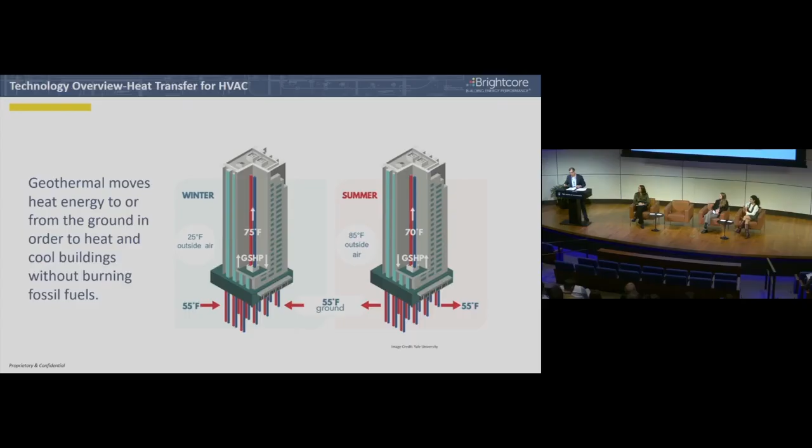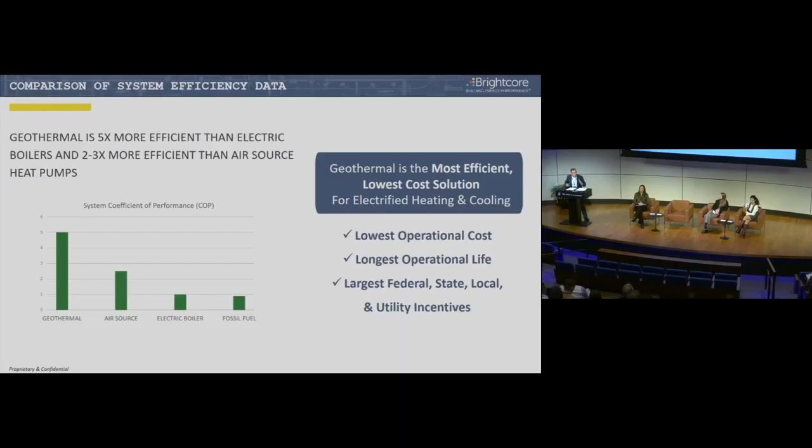So this is what really excited me about geothermal. The coefficients of the performance, it is simply the best way to heat and cool a building. But there's enormous challenges in doing it. If everybody could have it and it was cheap, sure, we'd all be doing it. But it's a real narrow applicability.

There's not a lot of work done in the retrofit market where, say, a place like New York City, 80% of the buildings are going to have to be retrofitted. They're going to be here in the next 30 years. You're not just going to blow up the Empire State Building and put a LEED platinum building in this place. You have to change the guts of that building. And if you're just doing lighting, we're not going to get there.

But it also requires really customized solutions. This is not a product that I can stick at all kinds of different places. You have to either bespoke, and they're very customized. We're going to talk about that in the project that we're doing at Yale. And finally, it's a really... whoops, I must have hit that. I got excited, sorry guys.

It's a disaggregated industry, and that speaks to this slide. There are all kinds of trades involved in this. You have designers, you have financiers, you have drillers, you have all kinds of construction work.

So what was first of its kind about this industry is that we changed the business model. We integrated everything. We made it turnkey, which sounds kind of easy, but it turned out to be incredibly difficult. We started out, and Dave, our head designer, is in the room, we started out with better design capabilities. Europe is about two decades ahead of us, and we're transferring a lot of their knowledge and experience across the Atlantic into using it in North American markets.

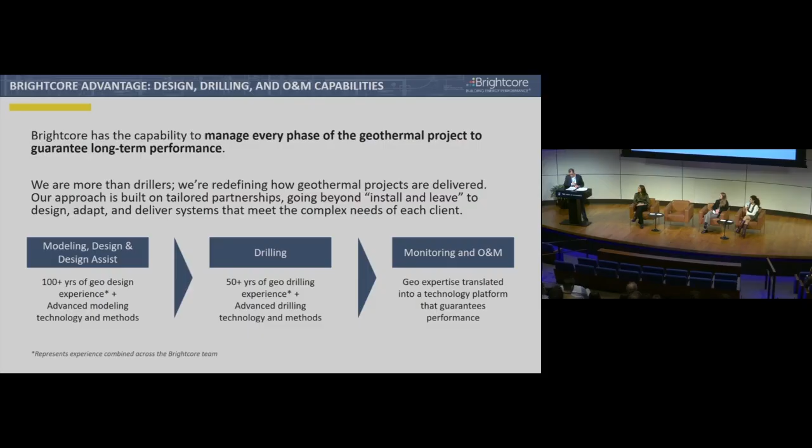So we invested very heavily in drilling equipment, which I'll show you in a moment. That's the design, and I'm not sure if that thing's supposed to rotate. One of these things is very, very cool.

We can design a solution in such a manner that we can actually get inside existing buildings like this if the operating system here needed to be replaced. That is a game changer because it opens up the addressable market tenfold. We can also do it in new builds, which is typical, but we can do it on angles and in space-constrained locations. So, to me, that's a real difference maker.

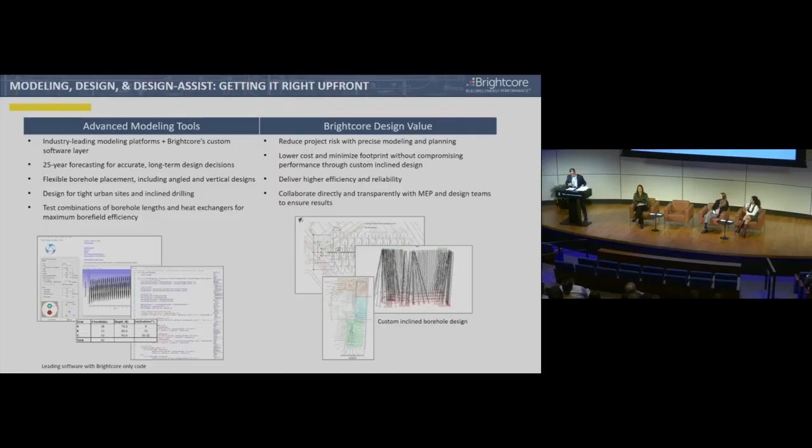You'll see a bunch of the equipment we have is absolutely vital. It's expensive, it's time-consuming, and it's very difficult to find workers to do this. I can buy all the equipment in the world, but if I don't have somebody to run it, I'm in trouble.

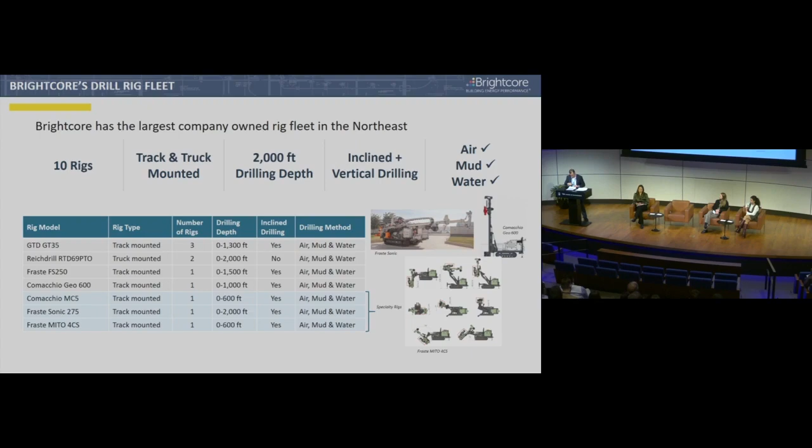Julie Zimmerman at Yale University has been really good about starting to think about how we get workforce development. We can get into that in a second, and in the last slide we'll talk about it a bit. But the urban geo that we are talking about is an example, and I'll show you a slide in about two minutes about what we're capable of doing - kind of seeing is believing.

The last aspect of this, though, is monitoring. I can tell you all the great things that geo is going to do, but if I do not have data and I do not have numbers, this is fiction.

Now we're starting to monitor these things, the O&M, the operations and maintenance. We come in there thinking we're the best thing since sliced bread, against an old school that knows how to run this system. We've been doing a lot of work with the former head of Princeton, and he said, look man, my operators don't want to talk to you. We are not going to be beta testing something that may be great in the future. It's binary - this thing works or it doesn't.

So we really have to de-risk these things. And this is a game changer for the industry.

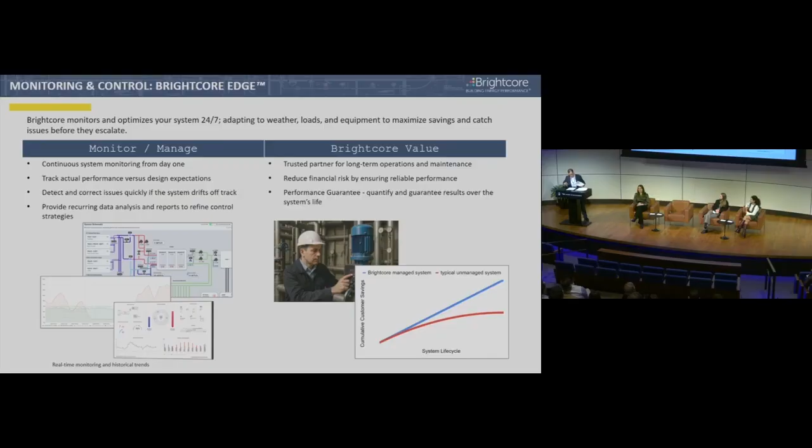In the end, we are selling savings. This thing either works and lowers your bottom line or it does not. We want all the decarbonization in the world, but it's got to make financial sense.

This is an example of what is first of its kind in North America. We were able to go to the Beresford at 81st and Central Park West - a 125-year-old building. We were able to slip this little rig into the freight elevator, make a gantry system, and take out what was the coal room, which became the oil room, and is now the geothermal room. They're saving 45% on their common area costs, and they've diminished their carbon footprint by about the same. That used to run on coal, then oil - now it's a very, very small amount of electricity to run those pumps.

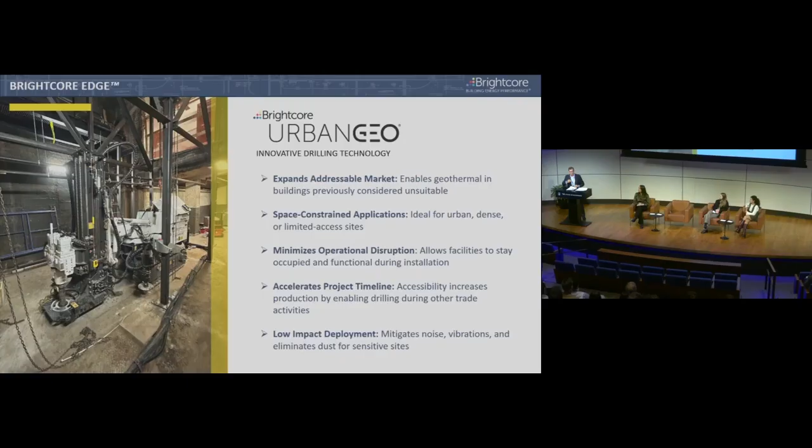Really cool. So what's first of a kind at Yale? Basically everything - every headwind that we have in the industry is on Science Hill. And we are so thrilled to be part of it, and scared, and learning.

So on your dime? No.

We have gotten so much better because of the hoops that we have to jump through - our drilling team, our design team. It has been a profound change, because if we want to have a customized solution for this university or that particular building, we have to know about that building. We don't - we know how to drill. Yale University knows about Yale, and what their needs are, and what their limitations are. And so it's been a real partnership that I'll talk about in a second.

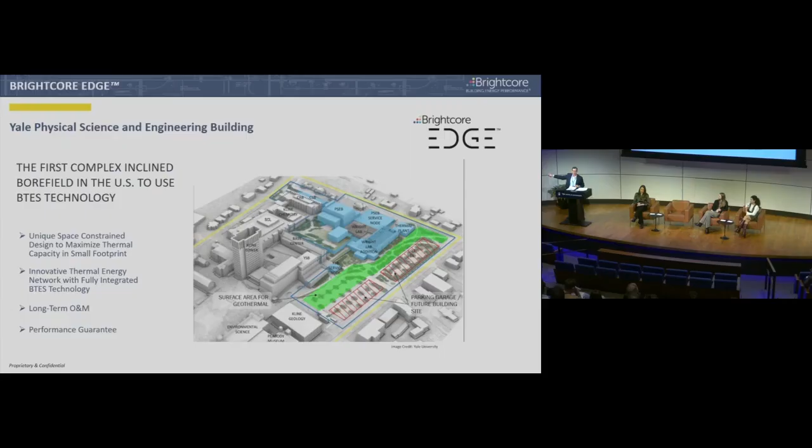But the other thing is space constraint, as I talked to you before. The property lines outside where we had to drill were incredibly tight. So as soon as we start deviating even a little bit - you're putting boreholes down that can go 850 feet - if you're off by a percentage, you're in your neighbor's house, and that's a problem. So we really had to be very accurate about that. Every bit of skill... this thing may rotate. There you go.

That is the bore field. If you look, this is not a typical design. They're usually 20 feet at center, which means you need about a football field or two to get the thermal mass you need to heat and cool a building. We are able to do it.

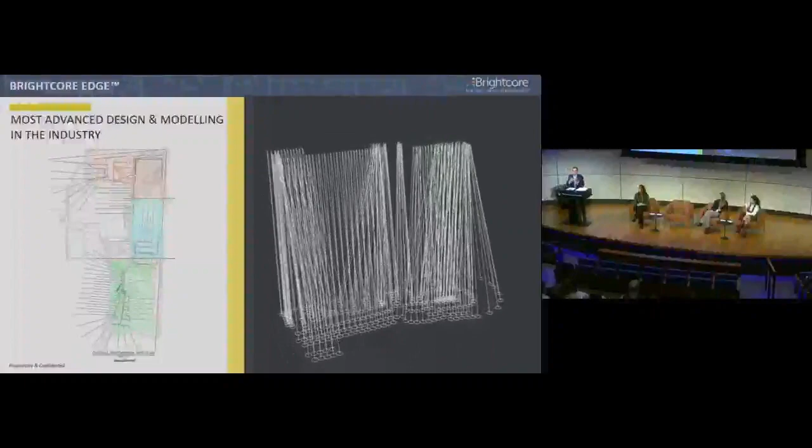The perforations in the surface are very, very small. We designed something for Malone Hall that instead of being a rugby field on the surface, it's truly not a bowling alley, but a bowling lane. They're 5.5 feet at center, and they come out on angles, very accurate angles on where these things are placed, so there's no thermal creep, right?

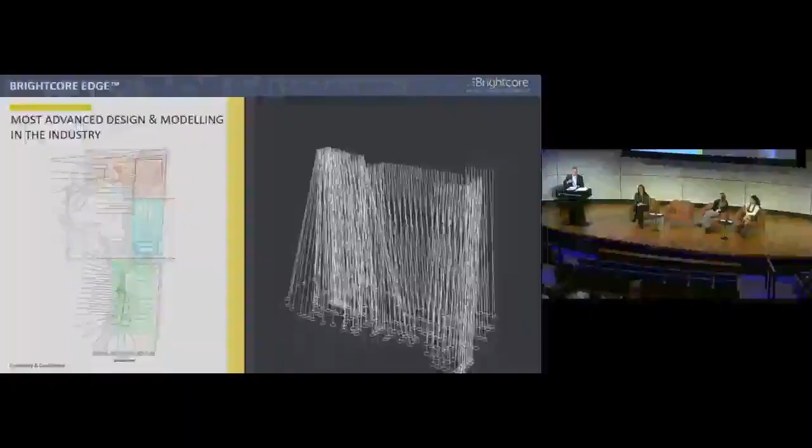So that one borehole is not influencing another in terms of its therms. This is game-changing for the industry, so it's very, very difficult. It's very complex, and to drill that is very, very hard. So we're extraordinarily proud about it. It's 262 boreholes in a space that's about 60% less than what a typical bore field would be. So that bowling lane accesses a thermal mass of a rugby field 800 feet down. That's kind of the beauty of this thing.

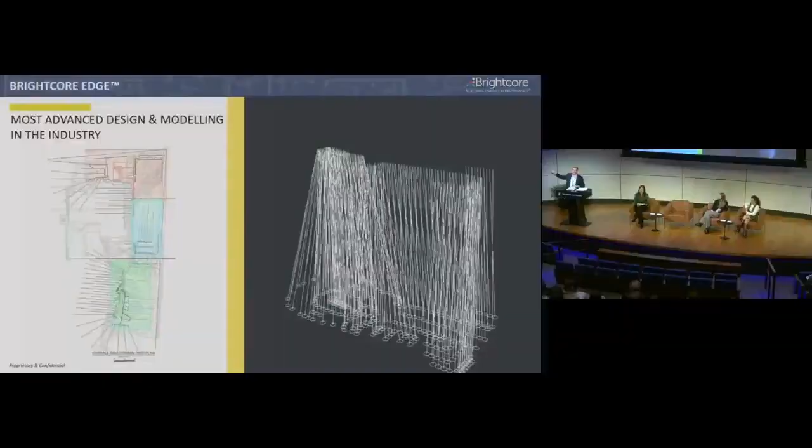The other thing that we have is a thermal battery, BTES, borehole thermal energy storage. We can preload individual boreholes, those lines - this one, that one, this one. Why? Because we have 60-second interval data, and we know tomorrow that the temperature is going to fall 17 degrees Fahrenheit. So we throw the energy in those holes, pull it out tomorrow at the peak.

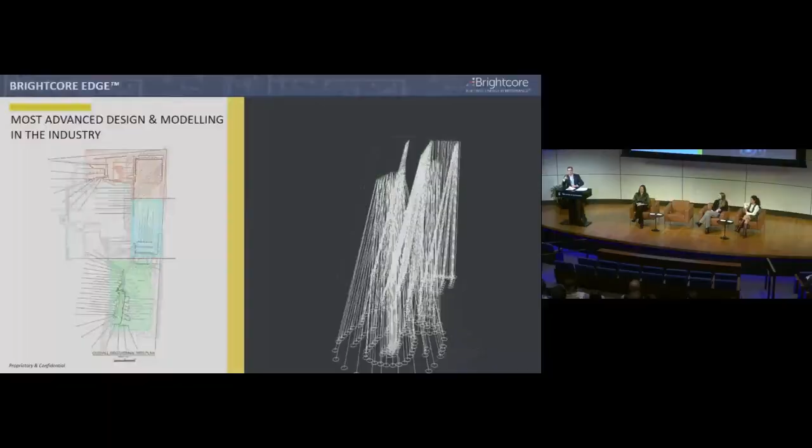The execution was extraordinarily hard, and I think I'm probably running out of time, so I want to hear the rest of the panel. But I will tell you the big challenge was there's 18 other trades here. We're bumping into everybody on an extremely aggressive time horizon to get this thing in, get the other trades done. All of this stuff makes sense in terms of federal funds coming and all that. So we had to be very, very accurate about what we're capable of doing and staying on that schedule.

And Yale has made us absolutely a better enterprise. The big thing, though, and we knew this going in, but we didn't know how hard it was - the Connecticut River Valley has very specific sticky clay. And if anybody walked by that field, it turns into basically Play-Doh. It's everywhere. It's on your shoes, it's in your nose, it is everywhere.

We had to develop a system just to get the spoils out so that we could actually return the water to the standards, the criteria that they have for kind of flushing the water through the system. And it was a bear to do. It made us behind schedule, which made the rest of the thing behind schedule, which made Mike Schreier very angry, which made me very scared, and we fixed it. So it was a really cool thing that we were able to do.

Finally, operations and maintenance I mentioned. We have put so much time and energy and money into this that now we have a 10-year performance guarantee, and this is a first in the industry. We are guaranteeing the thermal mass, the BTUs that the contract says - we'll legally have to supply these things. So we're at risk, not Yale. We're de-risking it for our clients and ourselves by the accuracy that we're able to bring. If you can imagine this campus, how much infrastructure is underground, when you're doing that borehole, you better be accurate.

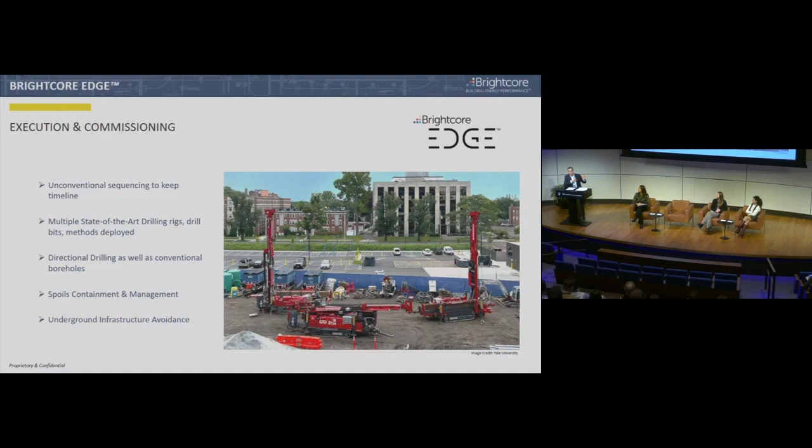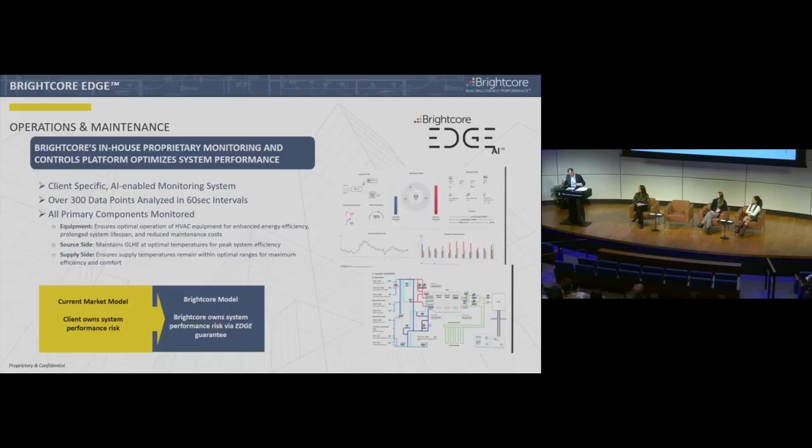Whoops, I'm a little behind here, guys. Sorry about that. So what do we need to scale? We need to change the model. We need to have this integrated approach. We have to lower time, we have to lower risk, and we have to lower price. That'll come with scale. But to me, the biggest thing is really the unforeseen challenges, the specific needs.

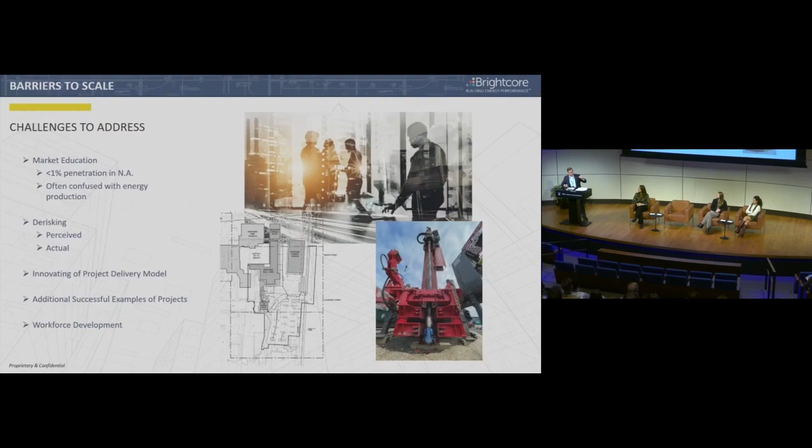You have to marry that partner. This is no longer Yale hiring a vendor. I'll just leave you with this thought - this is very much a marriage. A little bit corny, but honestly, we were talking about partnering with Yale. And this never would have gotten off the ground unless we could have iterated many, many times, because the conventional model would not have sufficed.

And we learned, even in a design coming in, what's possible. If you do not get a certain amount of BTUs, that 40% ITC - 40% of the project being paid for by the federal government - you weren't eligible for it. So having this thing right, understanding what the parameters are, and jumping through the hoops that Yale said is absolutely critical, or we're never going to scale. So it really has to be a custom-made solution, and you have to have a partner on the other side that is willing to partner with you.

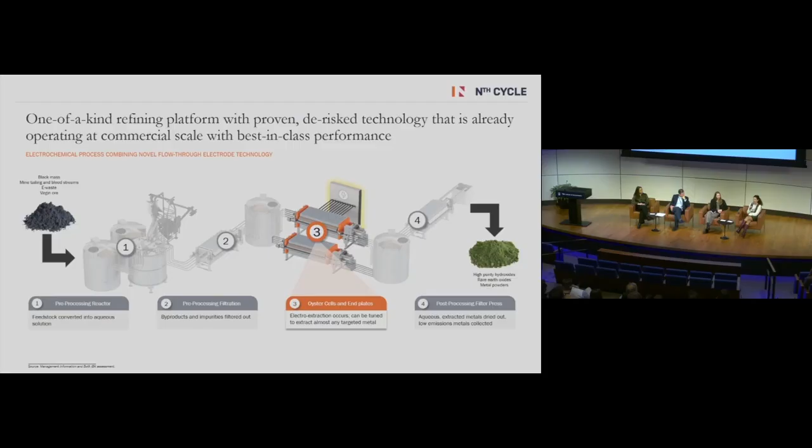While my slides are being put up there, we were asked to talk a little bit about our past and what drove us to get to work on first-of-a-kind projects. And I've had a bit more of a career jungle gym than a career ladder. I started off, I went to school at McGill University in Montreal, and I double majored in sociology and international development.

Quickly realized upon graduation that there are not a ton of jobs in sociology that you could really pursue. And actually, upon the recommendation of a friend, they said a lot of these consulting companies don't really care about your background, they're more interested in the way you think. So I applied and got into PricewaterhouseCoopers and was working in risk assurance, or internal audit.

I'm actually a certified internal auditor. I loved that job because it taught me how to think about risk and control gaps, but didn't see myself doing that for 10 years plus.

Then I was very fascinated with urban planning, so I ended up going back to school. I went to MIT and pursued a master's in city planning, and then moved to Houston, which funnily enough has no zoning. I worked as a planner there for 2 years. Again, I loved it, but just by way of being in the energy capital of the world, you sort of get sucked into energy. Oftentimes, I was the only person at a dinner party that wasn't in energy.

But then Greentown Labs opened up their Houston site, and Greentown Labs is sort of like the first-of-a-kind climate incubator that allowed a lot of the incubators in the space, like Climate Haven, to pop up after their success. I worked in partnerships there for 3 years. Nth Cycle was a member, or is a member of Greentown Labs, so was Fervo Energy.

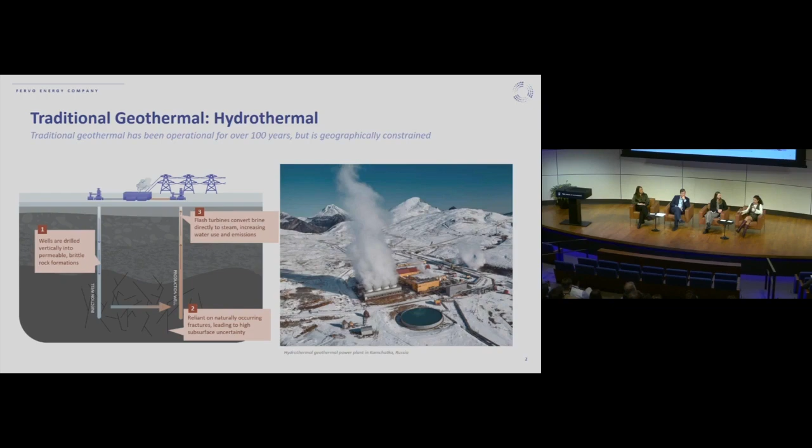Very problematic. So what Fervo does is take a playbook out of the shale revolution in oil and gas: we drill a doublet, which is an injection and production well. We go vertically, then drill horizontally, and then hydraulically fracture to engineer those fractures. Effectively, we eliminate dry hole risk.

We still inject water, it still heats up and goes back to the surface, but Fervo uses something called an organic Rankine cycle turbine, which is effectively a closed-loop, zero-emission turbine. Everything injected is recycled and reused, we have a very low percentage water leak-off rate, and zero emissions in the process.

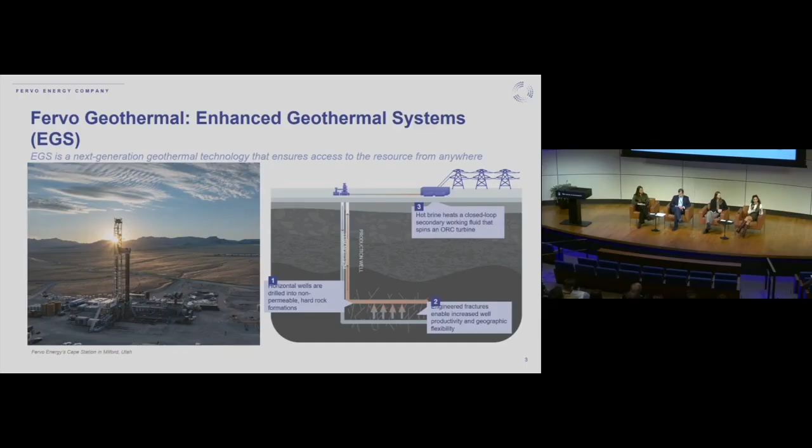Fervo was started in 2017, and I think a lot of life is a confluence of hard work and good luck. We de-risked geothermal at a time when power demand is surging, and people are very interested specifically in firm baseload power—power that's on 24/7. A lot of the hyperscalers driving that growth still have climate commitments, and geothermal is such an excellent solution because it addresses both.

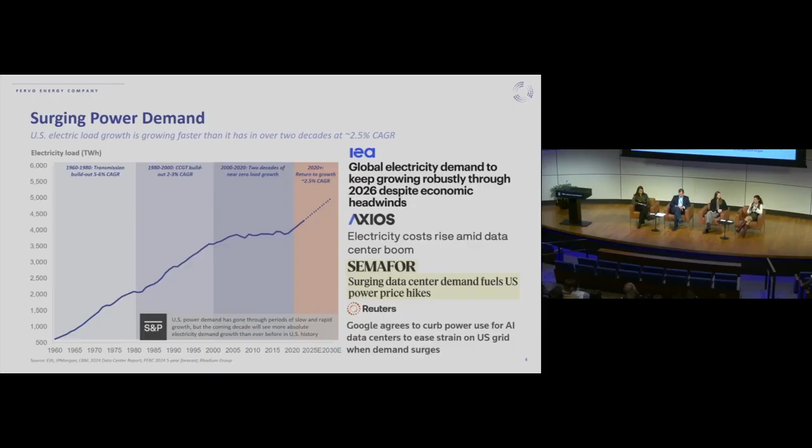That's incredible. But how do we know it's going to work like we think? Effectively, because we tried it. We had a commercial pilot with Google that we launched in 2023. It remains today the most productive enhanced geothermal project in history.

We went to an underperforming conventional geothermal plant and told them: no cost to you, but let us drill the doublet I talked about. If it works, we'll sell you the brine; if it doesn't, no loss to you at all. Because they had PPA obligations and were underperforming, they agreed. Google said, we're going to buy that power. And so we did it, and it was successful.

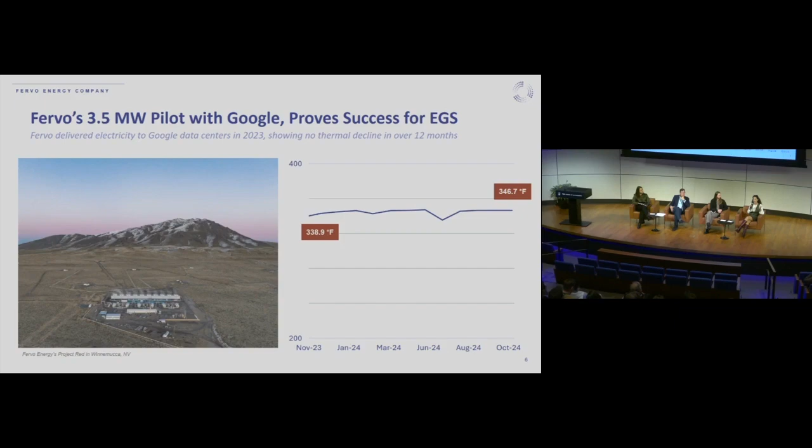It also proved there was a market for the electrons Fervo generated. Having Google as an off-taker was immensely helpful for a lot of our investors to understand that there's someone who's going to procure this power. We were also validated at a technology readiness level 9 after this pilot, which was also very crucial for us.

So we decided to more than 100x our pilot plant, which was 3.5 megawatts. We're currently building 500 megawatts right outside of Milford, Utah, a small town of 1,500 people, with 100 megawatts coming online next year and 400 megawatts coming online in 2028.

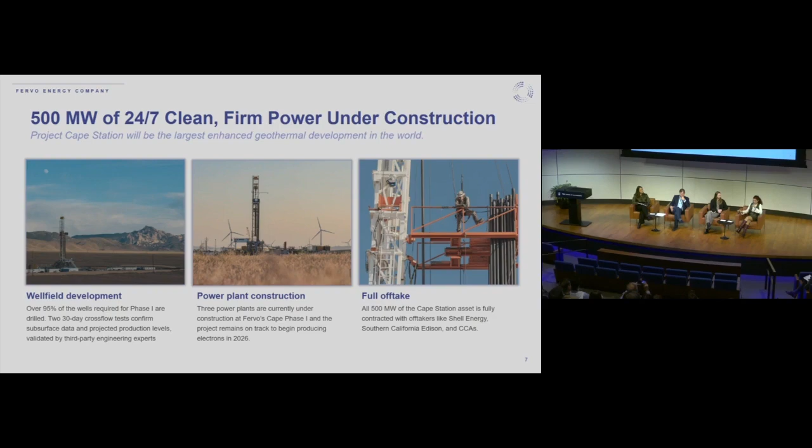So I'm going to show you a few photos because I think one of the benefits of having steel in the ground and an active project is being able to showcase all of this. So what you're seeing behind me is a cross-flow test, think of it like a midway point to just check and confirm that the resource is actually as hot and flowing the way you think it is.

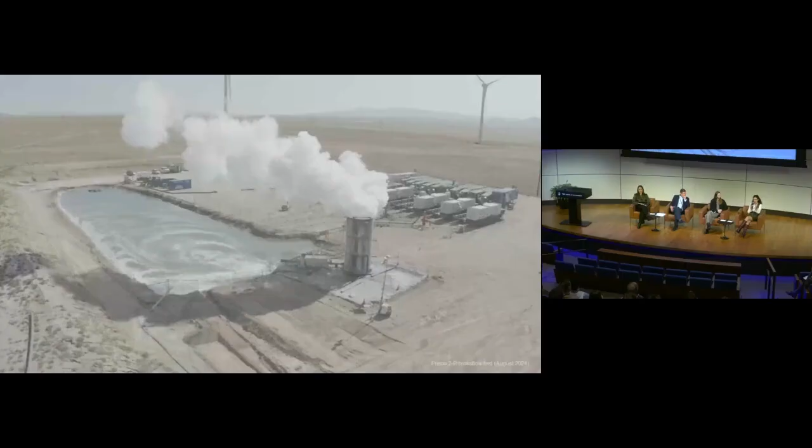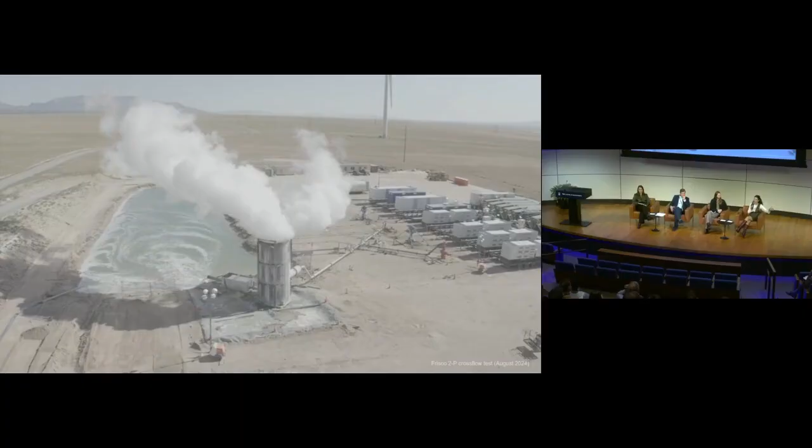For our first plant, Project Red, the one we did with Google, one doublet, one well pair, produced roughly 3.5 megawatts. This is producing 10 megawatts. So we tripled the productivity of our well going from our commercial pilot to our first of a kind. All this is just water, it's steam. When our power plant is built, you won't see any steam come out because it's a closed loop, zero emission cycle. But this basically validated that the wells we were drilling were the right kind, in the right places, giving us the right type of heat and flow.

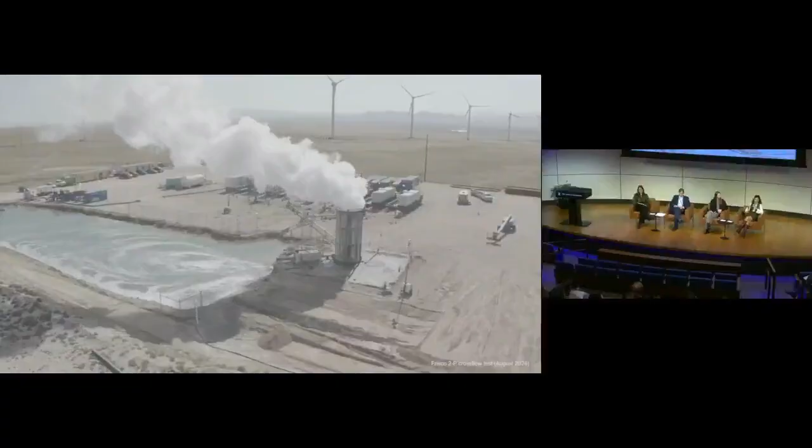Actually, all 500 megawatts at Cape Station have legally binding off-takes. So we've signed power purchase agreements for all 500 megawatts, and we're very excited about that.

One of the reasons we've been able to do that, I'll touch on one avenue, is because we've come down the drilling cost curve extremely fast. Conventionally, people thought drilling was the most cost prohibitive aspect of geothermal. We drilled our first two wells at Red in 70 and 59 days respectively. To date, we've drilled our fastest well in 16 days. That's a huge amount of cost saving. We've come down the cost curve 50%. We've saved time by up to 70%. For those familiar with what it takes to rent an oil and gas rig and set it up, it's hundreds of thousands of dollars a week. So being able to make this faster and more efficient means we're going to hit our CapEx goals at much faster returns.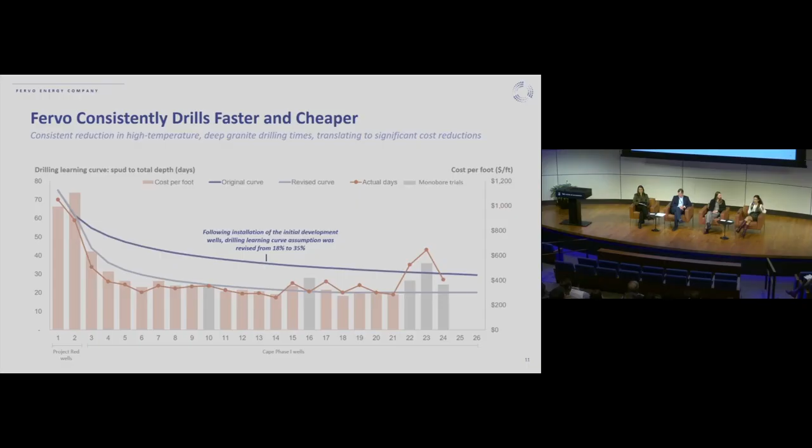The last thing I'll say is we've built an incredible group of partners who really believe in Fervo and our mission. Geothermal is lucky because it's one of the few energy sources that both sides of the aisle can agree upon. It was funny, when our co-founders started Fervo in 2017, they said we were bipartisan in the sense that no one knew what geothermal was. Now everyone really likes geothermal. Democrats like it because it's clean, efficient, and the energy transition in action. Republicans like it because effectively you're using oil and gas techniques, the oil rig that used to drill oil wells is now drilling geothermal. A drilling engineer in an oil and gas company is a drilling engineer in a geothermal company. So there are all these parallels, and of course, it provides firm power.

Maybe the last thing is, we have to mention AI somewhere. Fervo Energy is the largest geothermal leaseholder in the US, and we actually started buying land back in 2020. We used our Series A and Series B rounds to buy up all these geothermal leases. So we're able to confidently go to hyperscalers and say that our leases can align with where you want to build infrastructure. It makes a lot of sense because when we're talking about five nines reliability and availability, which is what a lot of data centers need, geothermal does work to provide that. And with that, I'll end and I'm excited to get into the discussion.